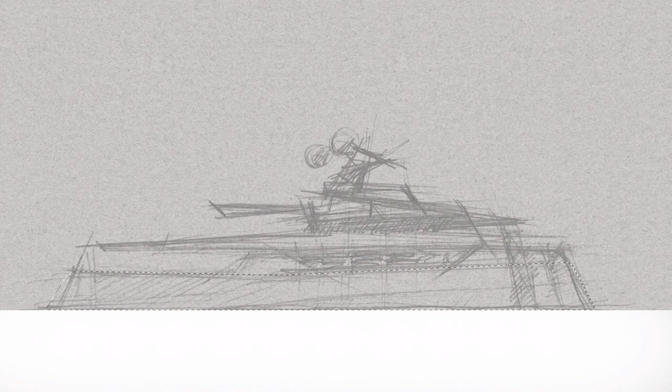The next step would be to elaborate on a profile. All right, this is obviously a different profile. It's more for an explorer type, still the volume forward, slightly higher up observation lounge kind of thingy, larger aft deck. But the principles apply just as well. That is, I would look for the main volumes first, that is the hull, the pieces of the superstructure, and I select them, I add color and a little bit of highlights, just to create a feel for the main parts before diving into the details.

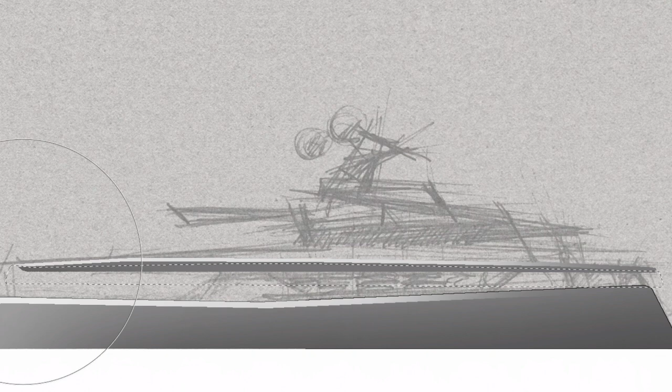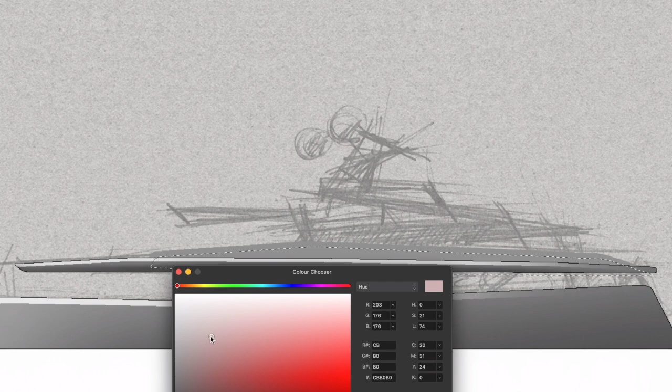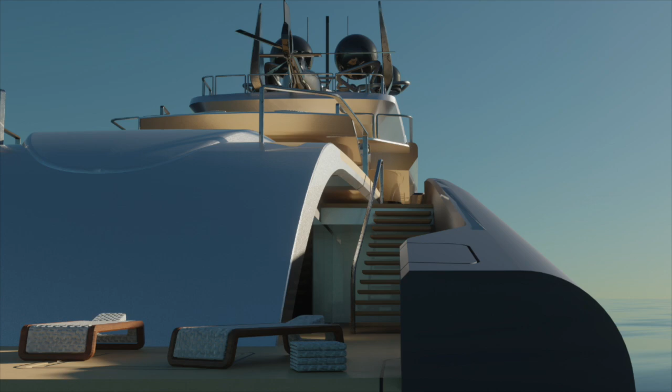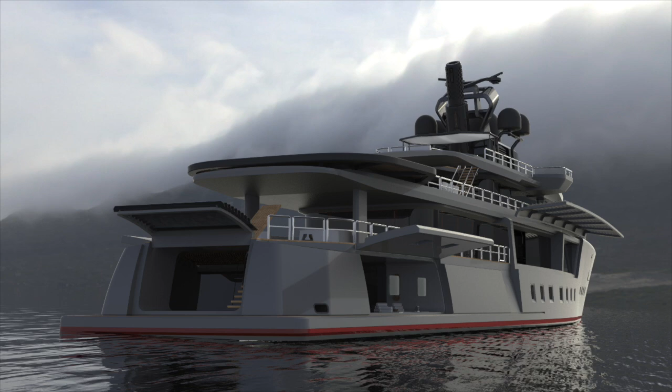Call me old-fashioned, but I do like the classic profile illustration, and in many cases it's already a very useful tool to communicate your design intent to the client. So you're almost ready to go into 3D, but take a moment and think of the features that you would like to implement, like the pool, the access to the bathing platform, the tender launching, whether you want a crane or whether you want to go into crazy stuff like asymmetrical superstructures, because all those things might actually not have appeared before when you were drawing the profile, but you certainly want to have them on the radar when doing the 3D.

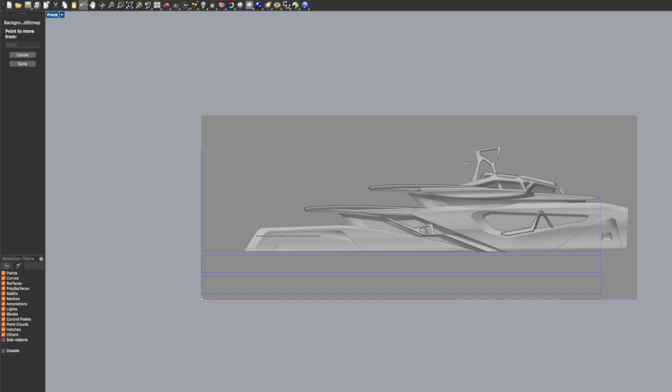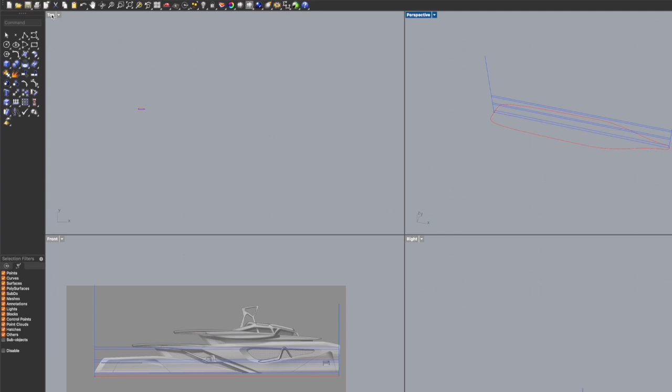And here we go. But let's start this adventure in a more organized way. That means we put a couple of goalposts up, like the center line, the length, the deck levels. And then we also import a profile as a background that helps guide us. I usually would put a couple of lines down that are the waterline, and then I start building up the surfaces from there, thinking about the tumblehome, thinking about what happens around the bow. But I think for today we've achieved quite a bit, and we continue next time.

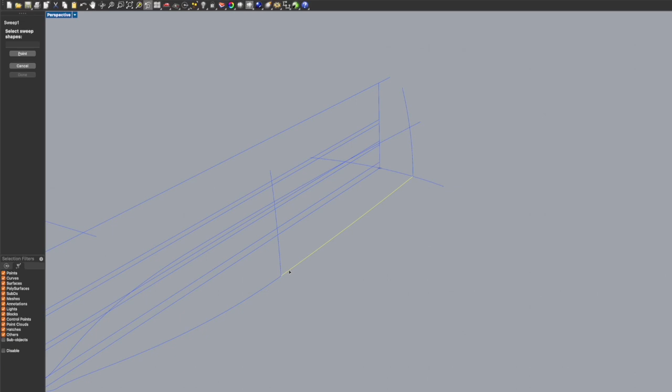One more thing for the young designers out there: don't try to make it look like a yacht. It's kind of a trap that you easily fall into, and it happens to me too. That you draw something, or even worse, when you model it later, you try to make it look like a yacht. I mean, that sounds a bit strange. It means you try to make it look realistic, which means that you use certain aspects or certain things that look like the other yachts out there.

It's a little bit of an obstacle. So free yourself from the thought that your yacht only looks like a yacht when it looks like the other yachts. If that makes sense? Yeah, good. I know you know what I mean.